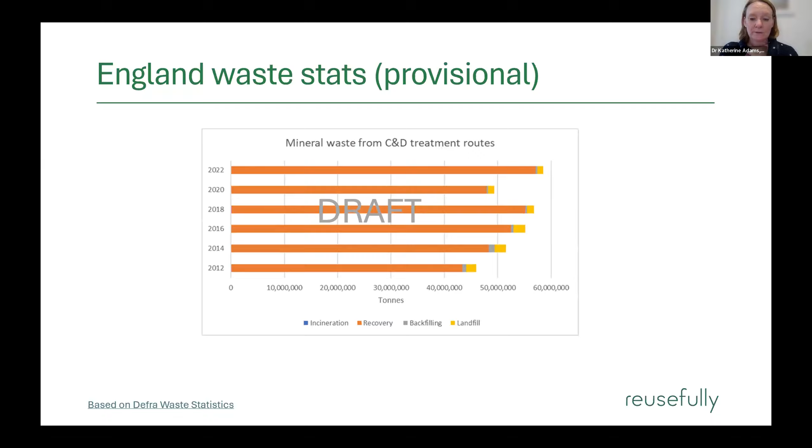As we know, we're very good at not sending that much to landfill anymore when it comes to construction and demolition, and you can see the different elements there. Most of it's recovered, but it's very hard to know if we assume some of that's downcycling, a lot maybe going to restore quarries, for instance, land restoration and that sort of thing.

Soils is where the issue is, though, when it comes to landfill, in that around half is still landfilled, and then with quite a proportion also backfilled, which is seen as a recovery option. So there's still a lot of work to do on soils and landfill.

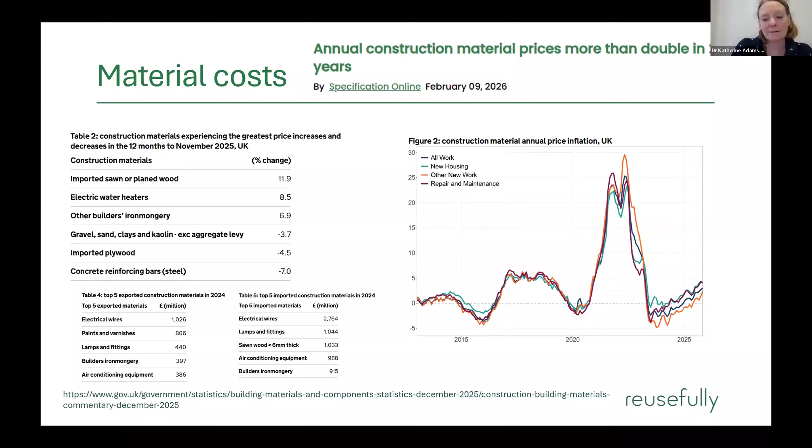Just to note the different sort of import, export material and different balances there. I guess the general gist, though, if anyone's working in contracting and buying materials, is that materials have largely gone up in price, which also makes waste ridiculous when you think about it.

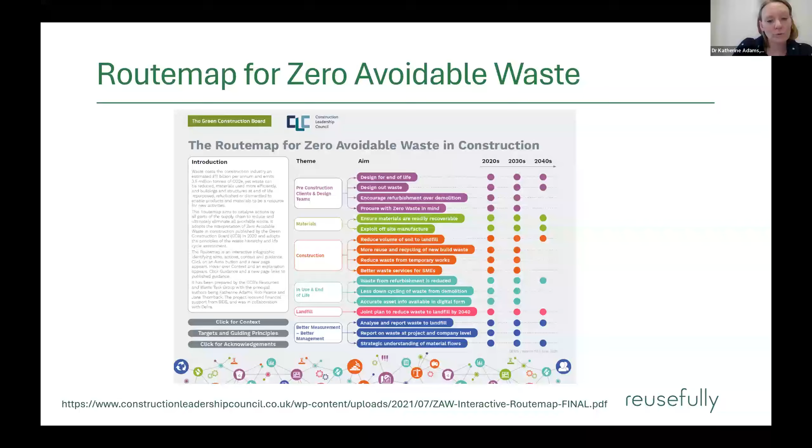Some of the work we've been doing, again with the Green Construction Board, is we had this route map a few years ago now, but it's still very relevant, and we are looking to update it. I think it's from 2021. As part of this, we did look at reduction of waste, as you would expect, and what the true cost of waste is. So I'm just going to flash up a few sections that cover this. So there's designing out waste here.

Our real aim here was that waste reduction targets become commonplace in most construction projects, or waste intensity benchmarks. And by 2030, we have some sort of target where costs are reduced through designing out waste and material optimization. So this is one of the challenges, really. We've been very good at diverting waste from landfill, but it would be interesting to know how many companies and projects have really robust waste reduction targets in place that are actually making a difference to the amount of waste being generated. And what does that mean from a cost perspective?

Similarly, the route map looked at how we could get better data, and part of that is reporting on waste at a project and company level. As I just showed you, the national data is not great if you want to dive into it and make any sort of reasonable, educated asks from it. So our asks here were really for contractors to develop key performance indicators and benchmarks and measure the true cost of waste on all relevant projects.

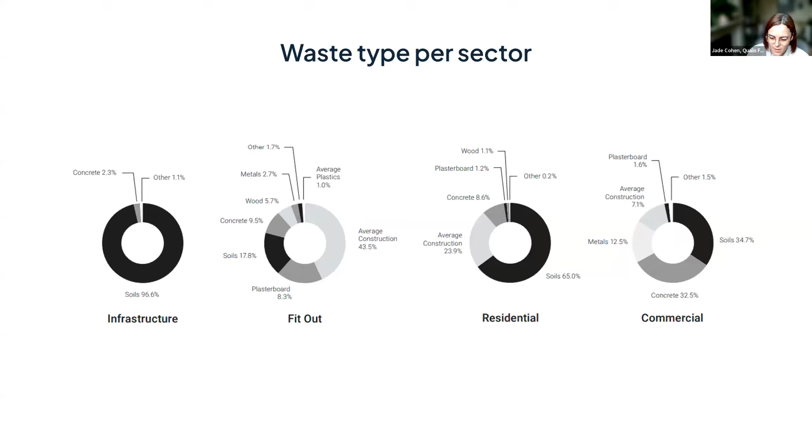Nonetheless, what we can also tell by combining the data on what's going out from these different types of construction projects with data on the waste returns from each of the waste facilities where that waste ends up, is the recovery percentages or the waste management routes of how that waste is being treated. So again, to reinforce the point with high levels of soils, whilst a lot of that can be repurposed in different ways or used for capping or other purposes, there's still quite a high portion that is sent to landfill within the infrastructure sector.

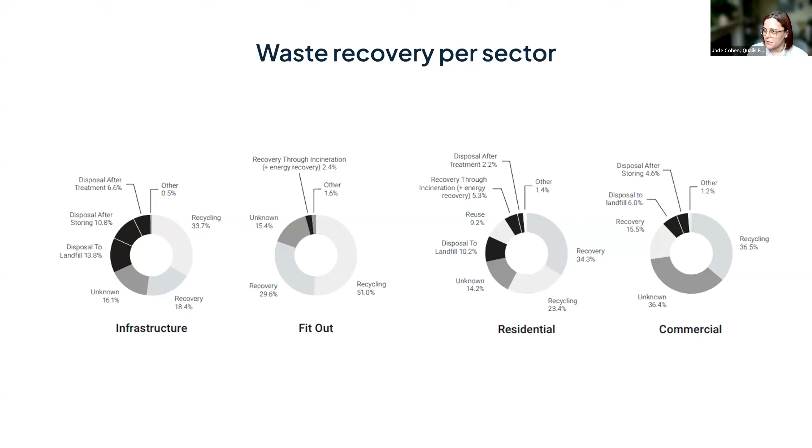And then you can see how that varies between the other subsectors there as well. So fit out, interestingly, also has one of the lowest rates that we saw at the time across the sample projects we're looking at for disposal to landfill. And actually, if I go on to this next piece here, some of the key things that we took away from looking at this data, the first one being a little bit obvious, but actually needs a little bit more interrogation, I think, with regards to how much segregated waste has a direct impact on the recovery route of that waste.

So historically, there's been a lot of assumptions around, the more segregated the waste, the higher the recovery rates. And we do see that in part with the example of fit out type schemes, where there seems to be, again, based on what the data is telling us, slightly more segregation of waste, and commercial having quite a bit of that as well. But actually the statistical significance of whether or not that directly correlates and has an impact on the overall recovery rate or diversion from landfill is still a little bit unknown.

And the reason I mention this is because there tends to be a lot of strategies around waste management on different projects focused on segregation. And I think whilst it's important, I don't think you should take away from other strategies that can be taken to either have more of a direct impact on minimizing waste or to improve the recovery in some fashion. So learning from the residential sector, haven't gone into detail here in terms of what those learnings could be, but I do think it's an area to keep an eye on.

Again, this data is telling us that out of the other sectors, this one has the highest reuse rates when it comes to waste going off-site. So what can we take from this sector that can then potentially be applied or learnt from between other sectors as well, and how do we maximise that? And equally, how do we minimise landfill for infrastructure projects, probably being the most obvious here as well.

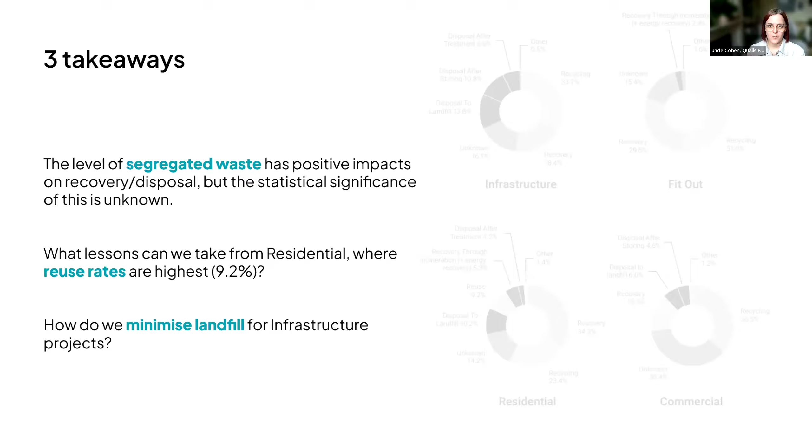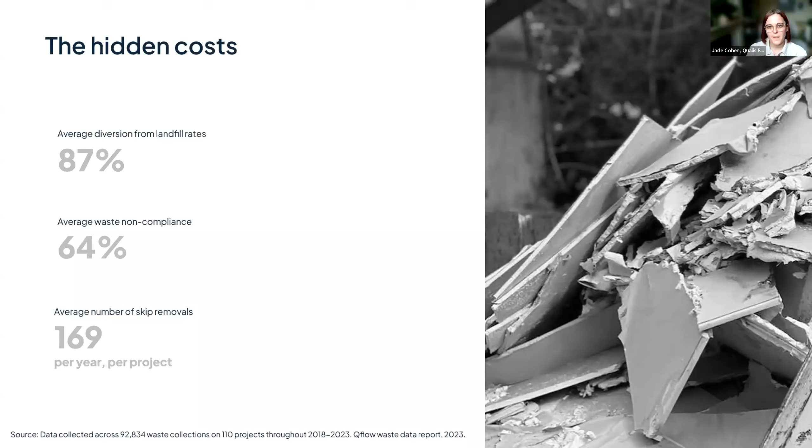And then to come on to the hidden costs. So interestingly, when we were running through the data for those sort of 5 years or so that we were looking at as part of that sample set, the average diversion from landfill rate was, whilst it was fairly high, it wasn't quite as high as I think what tends to get publicised quite a lot in terms of landfill no longer being an issue in this space. And whilst there's been a huge amount of improvements over years, I think it's still worthwhile bearing in mind that the diversion from landfill rates are still not as high as they otherwise could be.

And of course, with the landfill tax ever increasing, the average costs per project based on this are pretty substantial. Depending on the size of the scheme in question, of course, that number can go up or down. But alongside the cost to landfill, which is arguably an unnecessary cost depending on the type of waste that's being produced, the other type of cost alongside this, and the biggest hidden cost around waste in what we've seen, is the hidden compliance risk.

So what we worked out through for projects was looking at the compliance rates based on documentation, based on the permitting limits for different waste facilities that were accepting different types of wastes, and what the potential levels of fines could be based on the non-compliance that we were seeing across this many different projects.

And it's huge. I mean, in the report, I think we list, in this case, 13.2 million of potentially unclaimed fines from waste non-compliance. So not all of these will be realised in reality. That obviously depends on the regulator finding or uncovering some of these non-compliant risks in reality. However, the risk of that, should that materialise, is very substantial.

And then alongside this, of course, you have all the logistical costs of moving waste. Now, this was actually based on, I'm pretty sure it was about £500 per skip cost. But I think on the data that Katherine was just sharing earlier, around the quoted cost per skip being about £1,300, you can see this number being a lot higher, potentially quite conservative in this slide here.

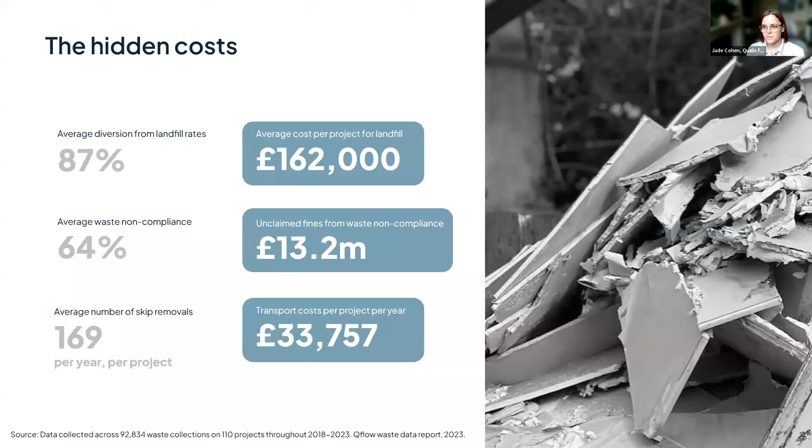The biggest hidden cost, just to touch on, that we've seen as well, is when things go wrong on site in terms of the materials coming in. And to that earlier statistic of that 13% going off straight as waste, this is where we see challenges of, you know, there could be the wrong tarmac installed in a car park, as an example we've heard about previously, that needed to be reworked later because it turns out that it was not the right level of permeability that was initially specified.

And so you kind of have these individual examples of mistakes that are made or incorrect materials handling that then result in these bigger challenges later, again, both from a materials and waste perspective, but also directly for a cost impact as well, because it's not just the materials in question, we're wasting time, labour, all the delays that then causes after the fact, and any potential legal costs associated when things go drastically wrong.

So just to very briefly touch on Qflow's role as part of this. So like I said, as a technology provider, we have the benefit of collecting lots of data that gives us a wider lens and a more detailed lens than perhaps national statistics. But on a project by project basis, what the software is actually doing is helping contractors and teams to very simply monitor all the materials that go on and all the waste that goes off via a photograph that's taken of the delivery tickets and of the waste transfer notes.

So in short, this is a brief schematic of how the system works. So with very little input, the system will then read the information, will enrich a lot of that data, do a huge amount of data cleaning, and then the system will flag when there are potential risks, both in terms of materials coming in, as well as of waste going out from a compliance perspective and other things like hitting certain thresholds and whatnot. And then all that data can then be fed into other systems, be that internal reporting systems, be that other more generalized sustainability reporting systems like Smart Waste or One Click LCA or similar.

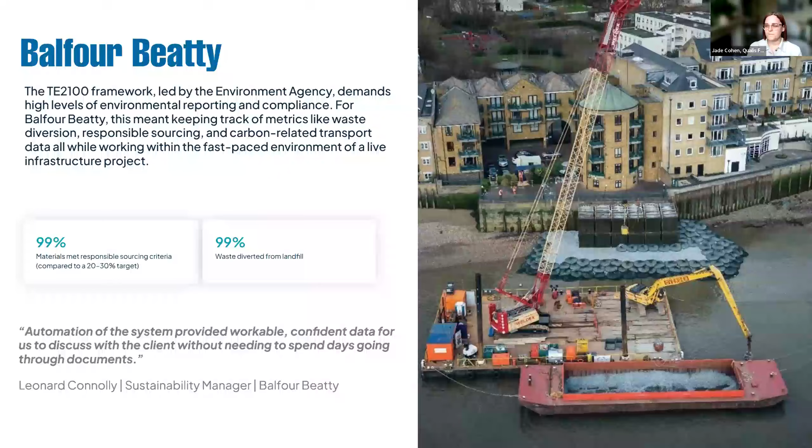So I'll leave it there. Hopefully it's given a bit of a view in terms of the data that we've seen collected across different sectors and what that means, as well as some examples of how we see this implemented in reality. And yeah, more than happy to come back on to any questions later on the panel.

Thanks, Jade. Yeah, that's really interesting. I think one point particularly for me is around the better segregated the waste, the more chance there is of a higher rate of material recovery. And I think that's also around that reticence of, is it waste or isn't it waste? And it's that intent to waste. So if it's your intent to look after that material and put it to one side carefully, it's not then waste.

I know quite often for construction sites, the issue often potentially isn't even around budget, it's just literally space. And it's trying to put things in place to enable that to work. And also, reducing waste is the right thing, but you can quite clearly demonstrate how it can be the good thing for budgets and finance as well. I think there's more than enough proof to show that the efforts can be rewarded.

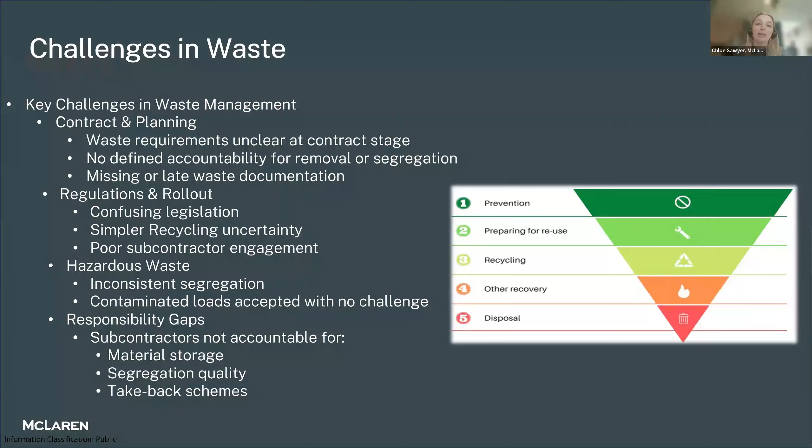When we're looking at how we are tracking and measuring waste, as it's already been mentioned a few times on the webinar, one of our biggest advantages is using Smart Waste. So thank you, Katherine, for all your work there. Smart Waste has been really great for linking projects with subcontractors with something called the Application Programming Interface, so APIs. And that allows the waste documentation to automatically be uploaded straight from the contractor onto our system. This has been really great for reducing that admin, cutting out the errors and giving us that cleaner data to work with, which is what you were mentioning as well, Jade.

But this tracking only really works if we're managing the waste properly from the start. So that's why we've implemented site waste resource management plans and waste minimization plans. So using those to identify the key waste streams, any opportunities for reuse, recycling schemes, and as I mentioned before, the take-back schemes to reduce where the waste is being produced in the first place and thus helping with the cost as well.

We've also been encouraging projects to streamline waste contractors where possible. So one of our sites in Wales has a really good example where they're just using one single contractor for all of their waste streams. And this gives us better control, more consistent reporting, cleaner waste segregation, and also reduces those gaps between the providers. And that also gives us better quality data because everything's captured in the same place by the same contractor.

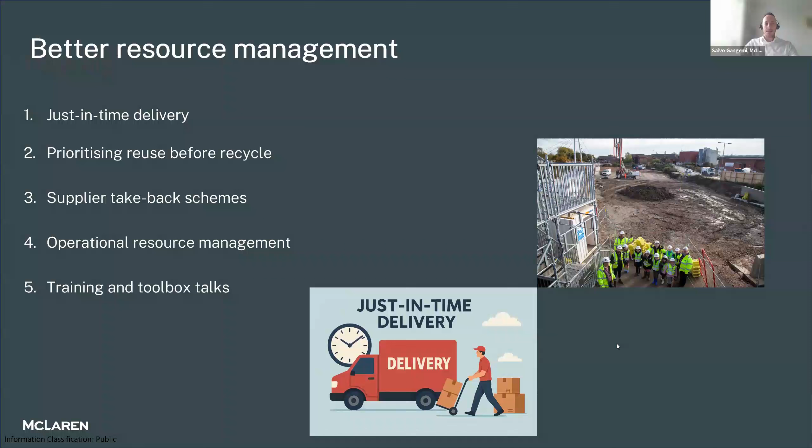In the built environment, material waste directly increases environmental impact. Managing surplus materials more efficiently reduces landfill, lowers embodied carbon, and makes better use of resources already on site. It also creates social value, for example through reuse of donated materials or supporting local community projects, which is increasingly important for ESG and planning expectations.

This is something we're trying to do, working together with the ASBP contractor working group. In one of our projects here at McLaren, we partnered with Yes Make to ensure that some of the historic timbers from our site found a meaningful second life. Some of the timbers donated were used to create rafters and roof slats, and off-cuts were reused to make benches and other examples.

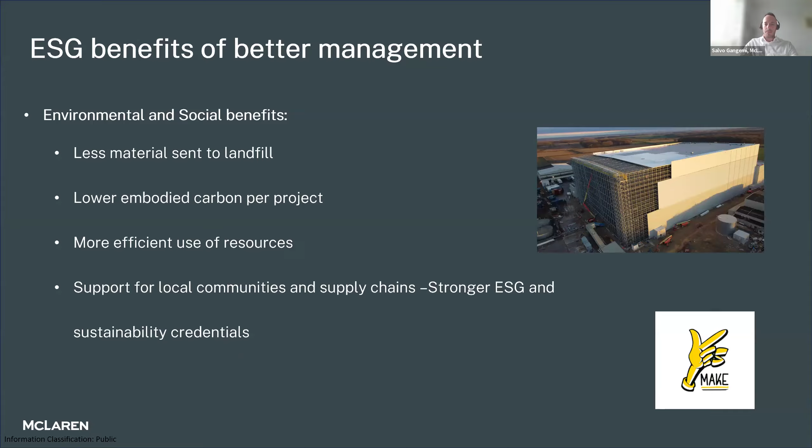From a commercial perspective, surplus materials represent wasted cost.

What we need is better forecasting, storage where feasible, and reuse to avoid disposal fees and unnecessary reordering. Well-managed materials improve site safety and efficiency. Importantly, strong waste management performance now supports tender success and client expectations.

We have seen a big emphasis from clients in terms of designing out waste at an early stage, so less waste sent off-site reduces skip hire, transport, and landfill charges. Surplus materials can also be reused on future projects, saving cost.

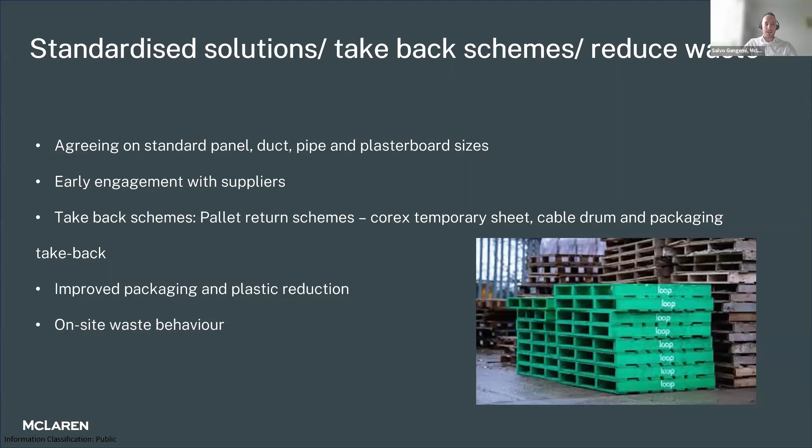Behavior change in construction is driven by clear incentives, simple systems, and consistent reinforcement. Incentives such as reduced waste cost, share savings, or performance-linked rewards encourage better material segregation and waste reduction. I actually like the Taylor Wimpey example, as I am involved with one of their developments, and it's interesting to know that they are prioritizing incentives rather than penalizing, as penalizing doesn't actually work for me.

Awareness is raised through design inductions, toolbox talks, and clear bin signage, as I mentioned before, and visible waste data that shows the cost and environmental impact of poor practices. To maintain change, these behaviors must be embedded into standard site procedures and subcontractor requirements, supported by leadership monitoring and recognition of good practice, making waste reduction part of normal site culture rather than just an add-on.

As Chloe mentioned earlier, we have produced a site waste management plan bespoke for our projects. We also work closely with the environmental team and the sustainability team to deliver sustainability and environmental site inductions. And we also have an initiative called Spot It, Shout It campaign to raise awareness on environmental spillages as well as health and safety. And that's us. Thank you, Debbie.

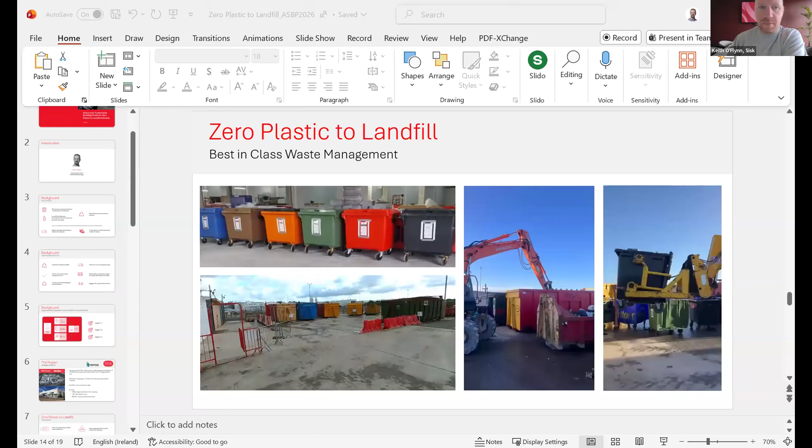Hello, everyone. Thanks very much to Debbie and all at the ASBP for inviting me here today to speak to you. I'm going to give you a run through of a specific initiative that we had on one of our projects in Ireland, specifically looking at waste, plastic, and packaging, and how better we can manage it on site and how we can drive best practice within construction.

Quick intro to myself: I'm Group Supply Chain Sustainability Manager with Sisk, a multifaceted role looking at all subtopics across environmental, social, and governance, with circular economy being a real key part of my role - driving circular economy initiatives on our projects, looking at waste reduction schemes and how we can better our waste through design and on-site management.

So a bit of background to bring you into the initiative. In Ireland, very much like the UK, we have a big problem in terms of our waste in construction, and 50% of all waste in Ireland is attributed to construction. These are EPA statistics, so it's quite stark, and only 32% of plastics in Ireland are recycled - a huge gap that needs to change.

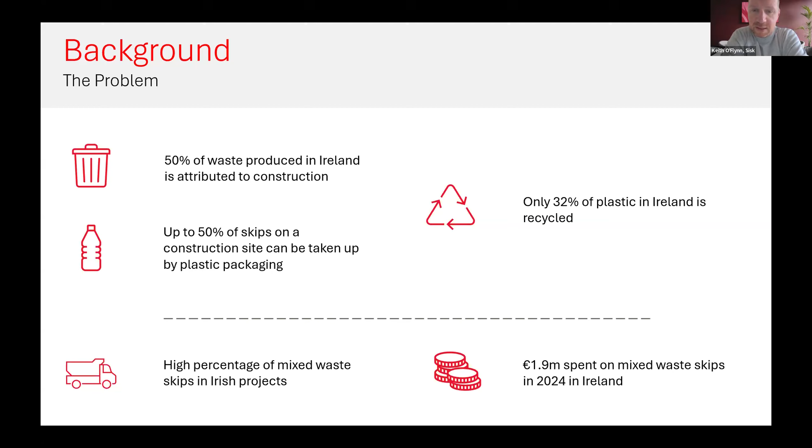Something we're really trying to change is that mindset when it comes to waste management across our sites and how better projects can be set up. This initiative showed that with a bit of outside-the-box thinking and some resources and investment, you can really make a change. And of course, within construction, we work on very tight margins within all projects, so for a company to be spending close to €2 million on mixed waste skips in Ireland alone is a significant chunk of any company's turnover.

So a bit on the proposal with this initiative, brought it to the project. I'll run through the project just after this. What we're trying to do is aim to send zero plastics to landfill. We are pretty good in terms of sending recycling waste as much as we can, but what we really wanted to focus on was sending zero percent, so 100% of all waste on our project would be recycled.

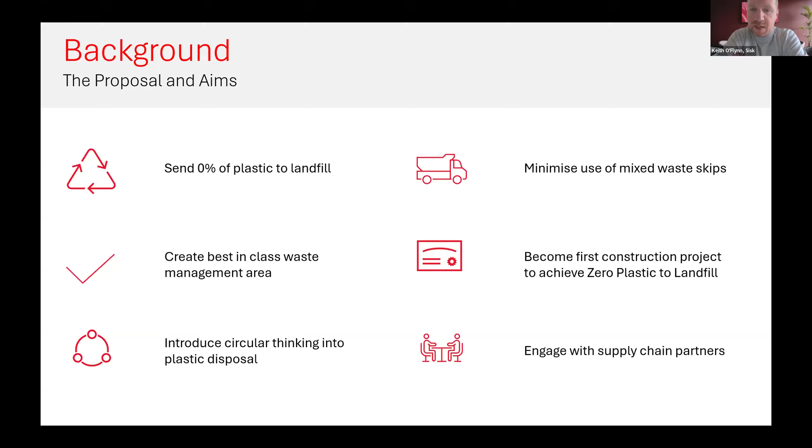Minimize use of mixed waste skips, obviously went through those statistics earlier. Create best-in-class waste management area. Become the first construction project or construction company to achieve zero plastic to landfill. Introduce circular thinking into plastic disposal, so not just sending our plastics to waste to energy, but how can we recycle our plastics, and engage with supply chain as well, since we're just a contractor and have to bring our subcontractors and waste management contractors in on this for it to work.

Just a bit of alignment internally. We have a strategy called Breaking New Ground, focused on our net zero goals. Scope 3, obviously waste sits in that category. We had different targets within our sustainability roadmap, and target 13 is probably most specific to this, which is to eliminate single-use plastics on all operations. Ambitious targets, but something that really drove this initiative initially.

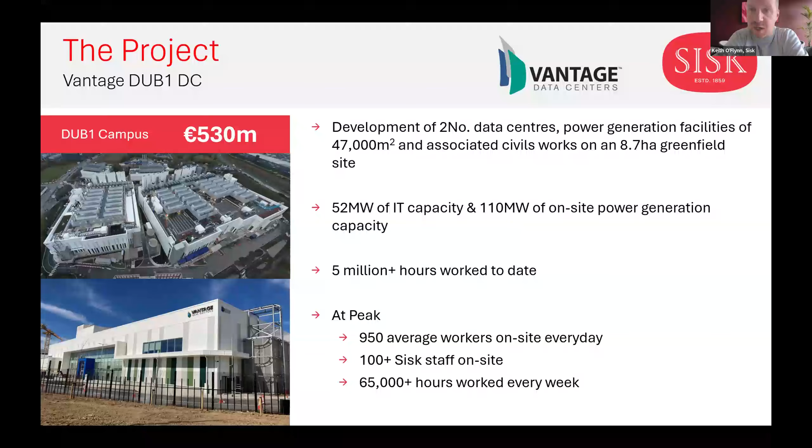Just a bit of background on the project itself. It's a large data center project out West Dublin in Grange Castle, development of 2 data centers, a large project covering 8.7 hectares, but not a lot of site really - every bit of space was taken up. But large scale in terms of workers on site, with 950 average workers on site every day. So you can imagine the amount of waste being produced on that site, not just through construction, but through general waste as well with those workers.

The process we looked at with the Zero Plastic Landfill initiative was to start at source - how do you make it as easy as possible for your subcontractors who are on the work face to better manage waste. Chloe and Salvo touched on it in terms of that subcontractor piece being critically important for any main contractor.

So with toolbox talks and engaging with the subcontractors on site, we also brought in color-coded bins, which made it easier for our subcontractors on the work face to see where waste is to be disposed of. There were about 6 different colors dotted around the different work faces, varying from metal, wood, plastics, dry mixed, mixed waste, and biodegradables.

When those wastes were disposed of at the work face and brought to our waste management areas, we were in a better place to segregate it then at source within that waste management area. We invested in balers for the site.

We bought 2 balers - I'll have a picture of it later. One was for soft plastics, your polyethylenes, and the other is for your cardboard. They produce a 50 kg bale, essentially taking that plastic out of the mixed waste skips or any skip and compacting it down, because we all know the amount of space our plastics take up in those skips.

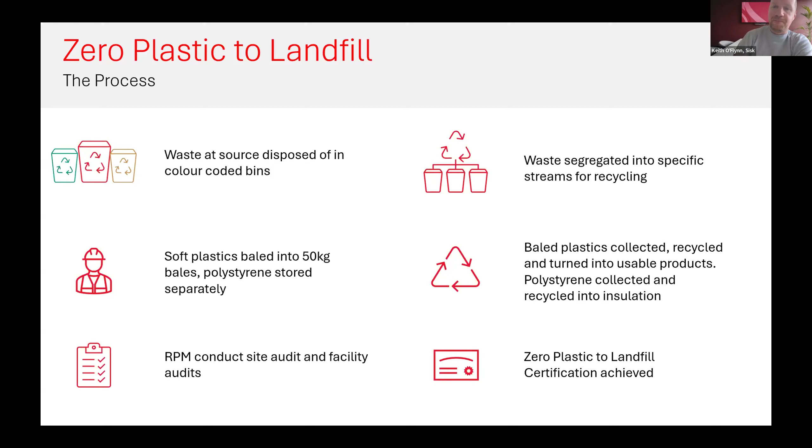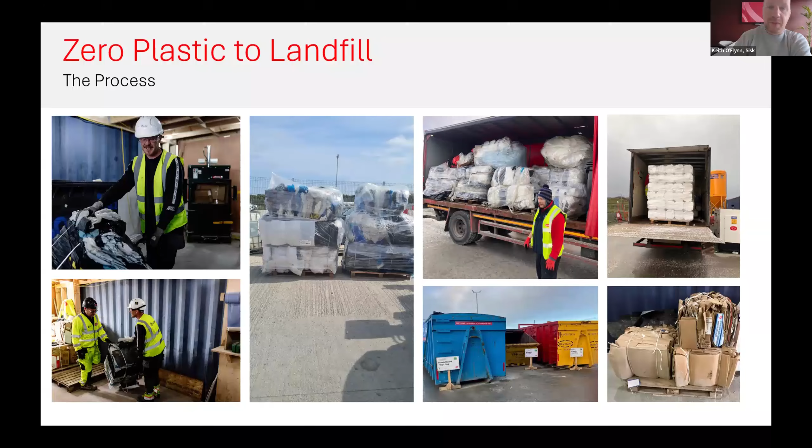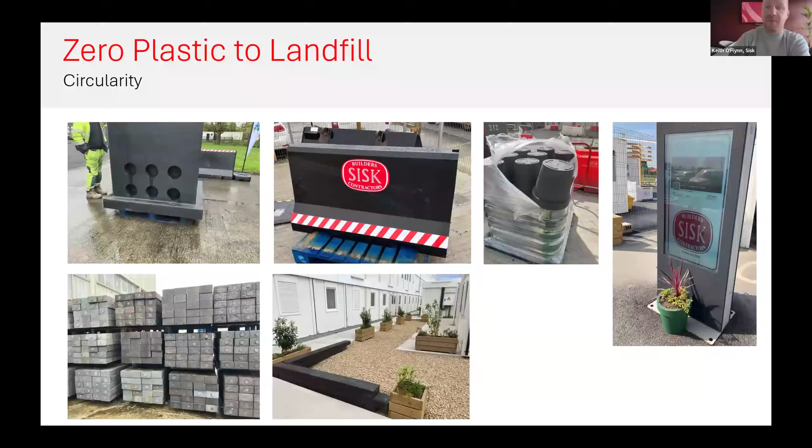The flower pots were great, a really, really cool product to be made out of recycled plastic. We were able to buy a pallet of them for a local school, St. Ronan's, to which we donated a pallet of flower pots. So a real good initiative there in terms of that outcome.

Just a bit of numbers, just to give you an idea. These numbers have probably gone up now, if I'm honest, since I created this slide. I would say this was maybe about 6 months old, but 15 tons of soft plastics recycled at the Vantage Centre in 18 months. 6 tons of polystyrene was recycled, and as I said earlier, polystyrene is 98% air, so you can see the volume of polystyrene which was recycled on our project.

One of the big things, obviously, with this webinar is about the reduction of costs. So we did see a 35% reduction in skip costs from our prelim budgets, and I'll run through that in a slide later. We're the first contractor to achieve zero plastic to landfill certification. Again, I mentioned the flower pots being donated, and then 0% of waste sent to landfill at the Vantage project. Just a number of our supply chain partners that we worked with.

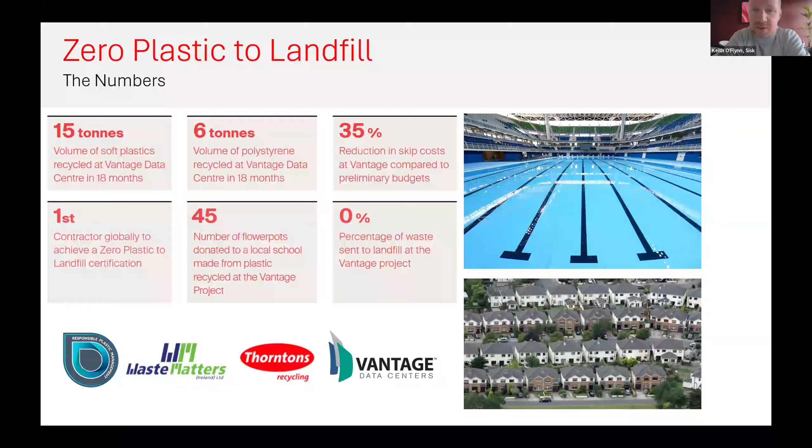And if you're wondering why there's a big Olympic-sized swimming pool picture on a waste presentation, it's just to give you an idea of the volume of polystyrene that we're talking about here. So 6 tons of polystyrene can fill an Olympic-sized swimming pool, and it can also create insulation for 82 three-bed semi-detached houses. So just to give you an idea of the volume that we're dealing with here.

So just some achievements that we made with this initiative. We were Best ESG Sustainability Initiative of the Year at the National Property Awards in Ireland. We also won Innovative Points for the CCS, and we had multiple nominations for different awards across the group, across Ireland as well.

To give you a bit of an idea of the different waste management areas that we had. So there, top left is at source with our subcontractors. You can see the various different bins. Just makes it a bit easier. And don't get me wrong, although it is all color coded, you do have to keep on pushing that initiative and really drive home and engage with your subcontractors almost daily, really to hammer home the message.

Our foreman on site, John Murray, did incredible work. Our contracts manager, Ian Thompson, and Donald Boyle, when he was with Sisk as section engineer, did really, really great work driving that on the site.

The bottom left there just gives you an idea of the waste management area that we had on site. Obviously, not every project can have a waste management area like this. Probably one of the reasons why we have such a high percentage of mixed waste skips is because a lot of Sisk sites are urban environments. But we're keen to use this blueprint to drive that waste segregation and manage those urban sites a lot better.

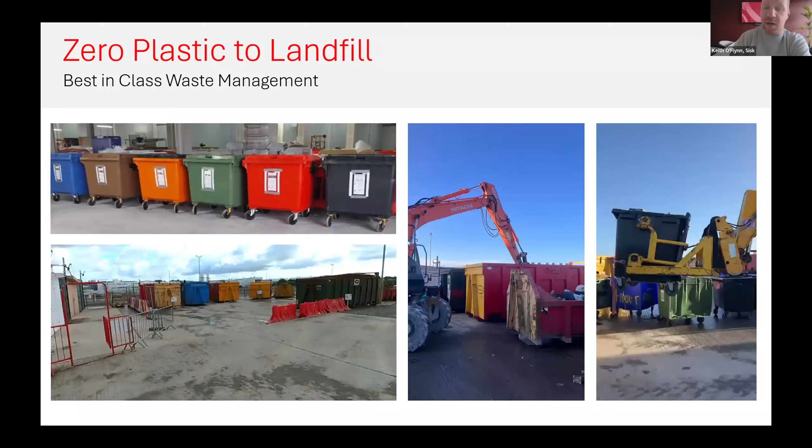Just a bit of an idea of some cool things that happened on site. Those electric cable drums were brought back to the actual manufacturer of the cables. We contacted them. He said absolutely take them all back, and said that not enough people actually contact them to bring them back. Something we're hoping to do is open up a bit more of a partnership with them.

And then on the right-hand side is just absolutely incredible, the workmanship on this picture. So we had these pallets on site that were essentially just going to be going to a wood skip or be reused and brought back to the manufacturer. But one of the crane drivers on the project, who obviously is a bit of a handyman, asked the foreman, John Murray, could he take them?

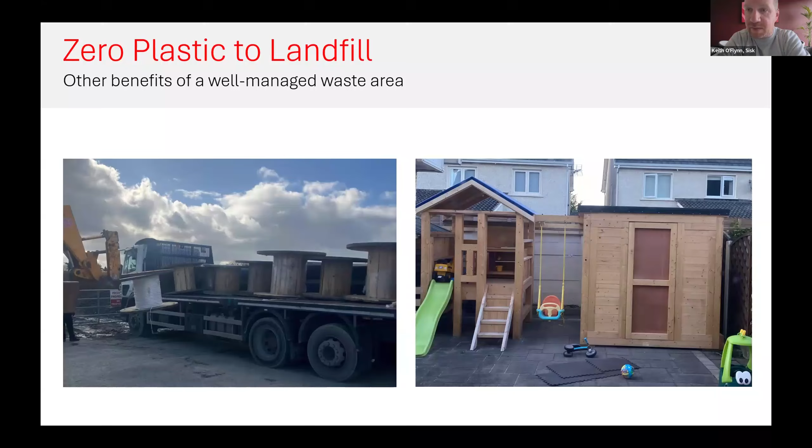And two weeks later, he sent John this picture. So he built his kids their own little playground and built a shed, all out of waste pallets and wood that came from that site. So incredible stuff there.

Something else that we're looking at on this project, but also in Sisk, is Loop Your Spare. It's a material exchange platform. There are a few material exchange platforms out there, but we're hoping Loop Your Spare will be a real driver for change and circularity within Sisk.

And Happy Earth, who are an Irish company, actually make medical grade PPE, but it's all biodegradable. So no plastic is used. It can all be put in your compostable bin. So we're engaging with Happy Earth about potentially buying in some overshoes, which can replace our single-use plastic overshoes, which I know different contractors use on different sites, people walking through offices. But these will be able to be disposed of in a food waste bin.

And then I see you're coming on, Debbie, to push me on, but I'll run through this in two minutes. Legacy here, we became Zero Plastic to Landfill certified at our head office in Dublin. And then our Man City project at the Etihad Stadium also achieved Zero Plastic to Landfill certification.